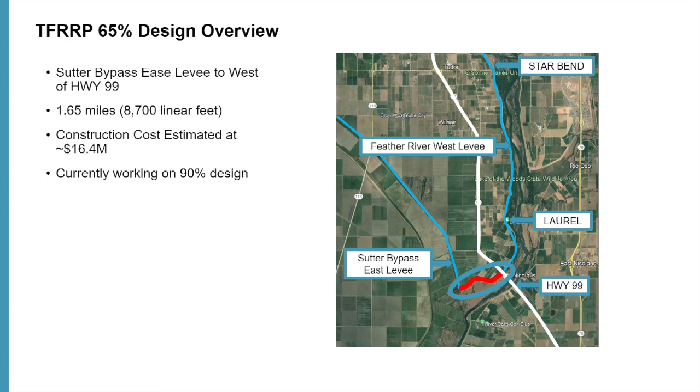For the work we'll be doing, we will be constructing cutoff wall improvements through this reach. Really those improvements can be broken out into two different reaches, almost split right at the middle of that S-curve you see. The most upstream reach, closest to 99, is the deeper wall we'll be putting in, about 60 to 65 feet from the working platform. So when they go in to do the cutoff wall improvements, they'll degrade the top section of levee to form their working platform, then excavate down from that point to construct the wall.

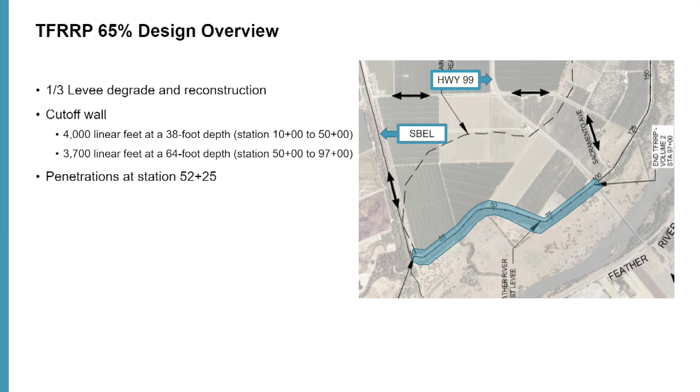The downstream section, about 4,000 linear feet, is a shallower wall that'll be about 35 to 40 feet deep. For the most part, our approach for construction is relatively straightforward. We do have some penetrations right in the middle there around Station 52 with some existing pipes we'll need to deal with. We also have sections that feature a landside irrigation ditch, as well as a ditch on the water side, which is Nelson Slough, that we're going to have to work around. Other than that, construction should be pretty straightforward.

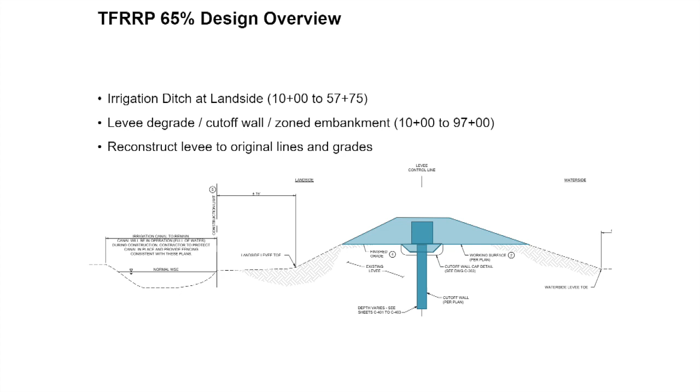This gives just an overview, a typical cross section of the work we'll be doing. On the left side of the screen, that shows the landside ditch I was talking about. This doesn't show, unfortunately, the Nelson Slough waterside ditch, but the area shaded in blue is the area of levee that will be degraded as part of construction. That material will basically be pushed to the side. They'll excavate, construct the cutoff wall, and then reconstruct the levee back to its original lines and grade.

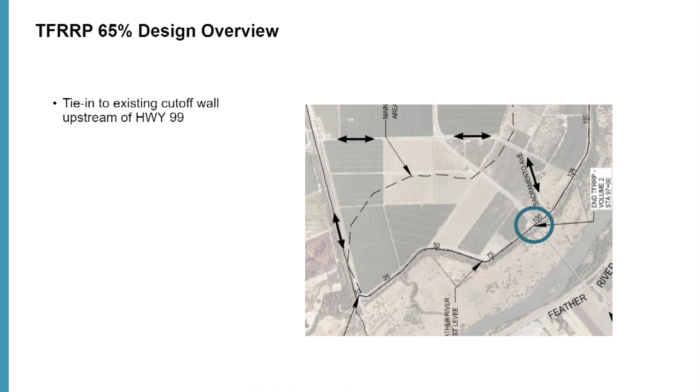So I wanted to give you a couple highlights of things the team is currently working on as part of design. One of those is our tie-in at Highway 99. Upstream of here, we've completed the cutoff wall improvements, which terminated just upstream of 99. Our improvements as part of the Tudor project will need to tie in, but since we're not able to construct improvements right through the highway, the team has been looking at different approaches for how we'll address any potential end-around effects.

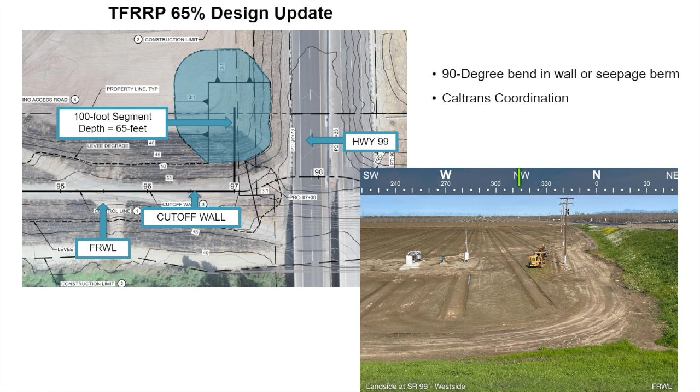The other approach they're looking into is a seepage berm at this location. We're currently in discussions with our independent panel of experts on this approach as well, and we've had continued coordination with them throughout the design process. We actually have a meeting scheduled with them next week to talk specifically about this, to make sure they understand what we'll be doing and concur with the remediation. We've also been in coordination with Caltrans since we'll be working at and near that freeway embankment. We started those discussions last month and will continue coordinating with them on necessary approvals to facilitate the work.

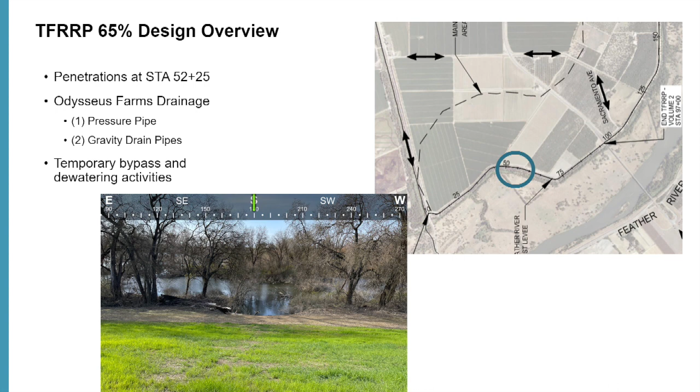So the details we're currently working on relate to how we'll facilitate that work during construction - the temporary bypasses that'll need to be put in place to maintain operations needed to facilitate drainage while construction is ongoing. Then there's the specific dewatering activities needed to construct the outfall structure, since that work will take place right within the slough. We're working on detailing that out, and we're including all of that descriptive information into our permit applications for the project.

Our environmental consultant has been very busy putting together our admin draft CEQA document. That EIR admin draft was actually just delivered to us today. We'll be reviewing and providing input to our environmental team with the goal of getting that out for a 45-day public review in May.

They're also busy working on our 404 and 401 applications, and we have already sent the request to the Flood Protection Board and the Corps to initiate the 408 process.

As I mentioned, we are coordinating very closely with our independent panel of experts / safety assurance review panel. We met with them last week to go over general comments regarding the 65% design submittal, and those discussions led to our meeting next week specifically on the tie-in at 99.

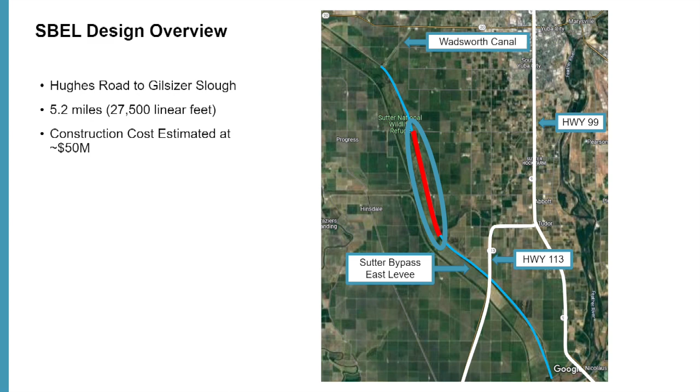So we're currently in the data collection phase. Our geotech team is busy working to get some additional explorations done. MHM has been out doing topographic surveying the last few weeks, and they're looking to wrap that work up next week.

And we've also begun some of the preliminary right-of-way investigations. At this time, we're not anticipating the need for any acquisitions for this project. We feel like we have enough right-of-way within the existing land already owned by SSJDD for the bypass system, but we are beginning that work and will be preparing a real estate plan to document that.

Some things I wanted to bring up that we'll continue to work through for design of this project: one of the big things will be the DWR pump station right at the end of O'Banion Road. The state owns and operates a fairly large pump station there, so what we do with the existing pipes that run through the levee at these locations will take some work to figure out the approach we want to go with.

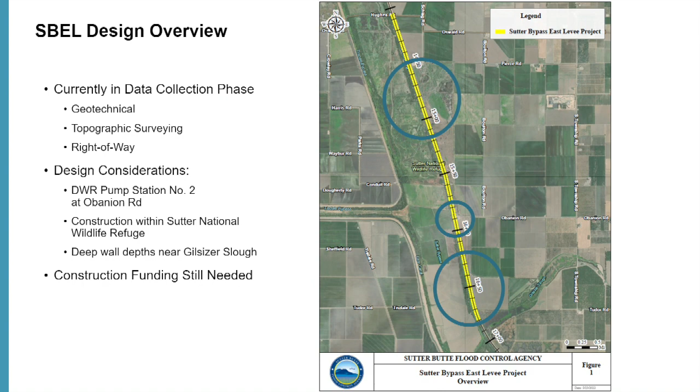So for the schedule overview for Sutter Bypass East Levee, I didn't anticipate getting into this in detail. Don't worry, I know there's a lot here, but essentially we're just starting. This is us today, the 65% design submittal.

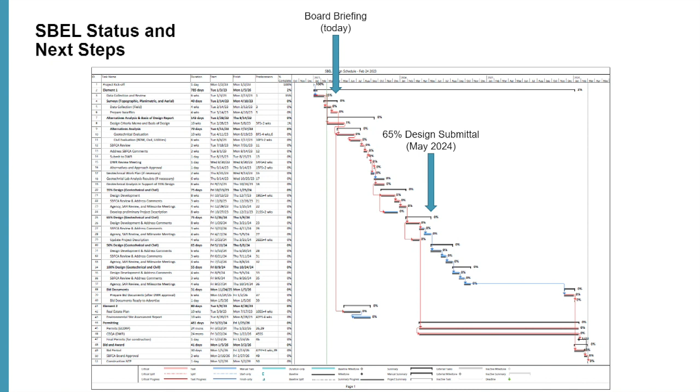So this is just to give a little perspective on where we're at with the Tudor Flood Risk Reduction Project right now, we'll be there with Sutter Bypass East Levee about this time next year. So we do have quite a bit of work to do over the next year to get to that 65% design point. And then we have a construction target for this project scheduled in 2026, assuming everything goes smooth. I know there's a lot of things that are sometimes out of the agency's control in order to hit that 2026 target date, but that is what we're working towards right now.

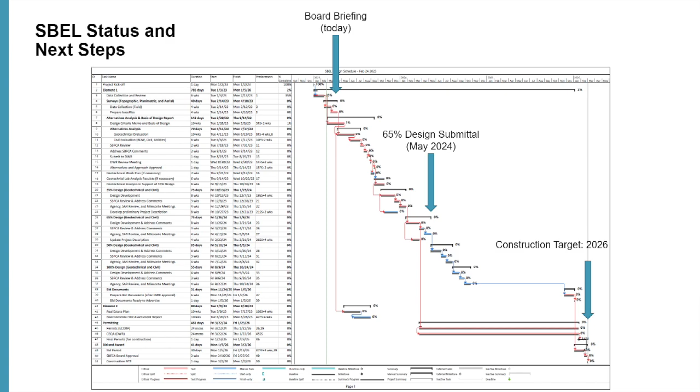So that concludes my presentation. Maybe at this point I'll turn it back over to the board, see if there's any questions or comments. Thanks, Chris. Any questions for Chris?

Seeing none, I actually have a couple. So your CEQA cost, what do you think it is for that project? Is that the cost to do the environmental document?

Yeah, just rough, I was just curious. I would have to get back to you on that. We issued a task order to ECORP, which I believe was around, don't quote me, $700K, but it included a full list of other items, that includes our 404 and 401. So I'd have to look to see exactly what the CEQA component was.

But that was just for the levee improvement. That wasn't for the bypass, correct? Correct, yeah, so roughly 750.

That's not bad, I mean, a lot of money, but compared to what the county has to pay for certain little projects, it's unbelievable. Well, and keep in mind that is the upfront work, right? So once we go through that permitting process, then we get handed mitigation measures from resources agencies and monitoring requirements and a lot of other things that we'll need to do as part of construction too, which also draws from that same category of environmental related funds.

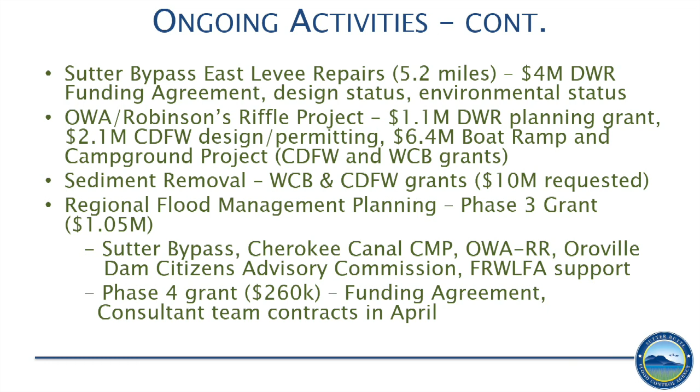On our regional flood management planning grant process, YWA is a partner in that project with us. We received our phase 4 grant from DWR for $260,000. We're issuing contracts now with the consultant team that worked with us on phase 3, and we'll continue advancing the planning efforts for regional flood management in the Feather River region.

This is my last slide. As I brought to the board a month or so ago, the City of Oroville is looking for assistance to repair a levee in their system that's in disrepair, about 1 mile long. Chris and I have been working with city staff to scope out a services agreement and scope of work that SBFCA would offer the city. We're in active dialogue with city staff right now. Once both sides have agreement at the staff level on what type of services and how they'd be paid for, I'll bring that back to the board for approval. So that's in the works.

On the federal project side, we're working closely with the Army Corps to close out the 5-mile project the Corps constructed south of Star Bend. There are still a couple of punch list items that have been long overdue to be completed. I think we're making good progress, and that work will get done once we're out of flood season.

On the federal crediting side, as I reported to the board last month, we have approximately $28.9 million in credit as a result of SBFCA and DWR advancing the Feather River West Levee project ahead of the Army Corps. When the Corps finally caught up, we had constructed the majority of what was deemed the federal project, and we have this credit left over. We can't utilize that within our basin, so we want to sell that credit to convert it into cash, which we can use to build flood risk reduction projects here within our basin.